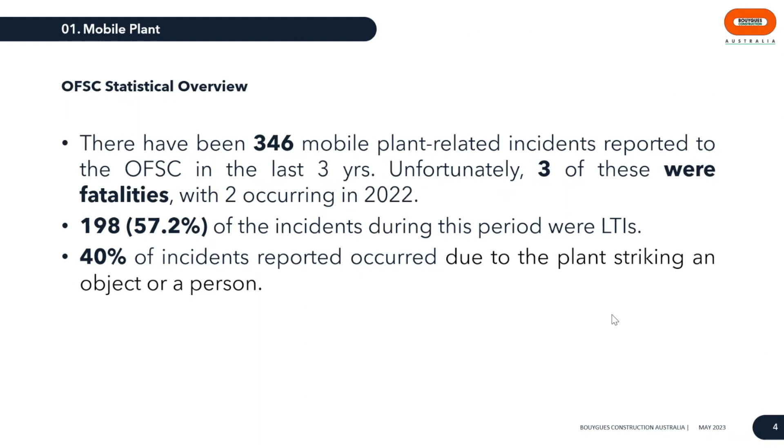40% of the incidents reported occurred due to plant striking an object or person. So plant are certainly quite prevalent in terms of incidents being reported by scheme accredited contractors to the OFSC.

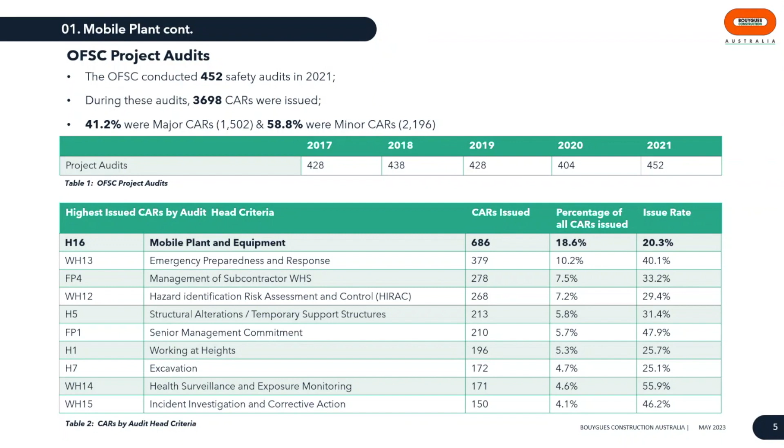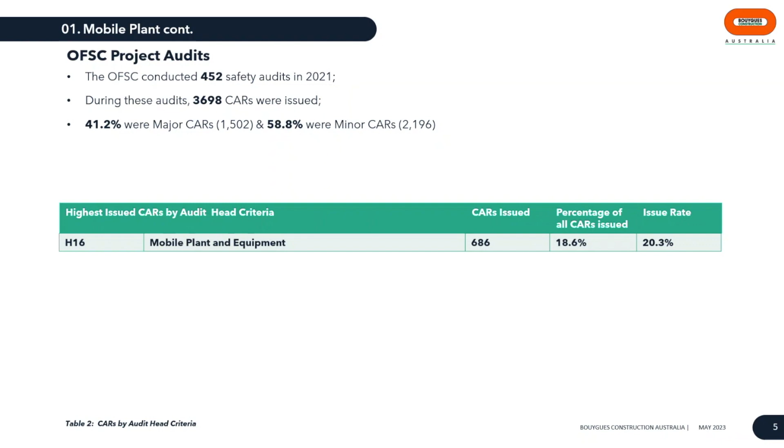In terms of OFSC project audits, there's been 452 conducted in 2021. In terms of the breakdown across the scheme criterion, if we look at hazard criterion 16, mobile plant and equipment, there's been 686 CARs issued, which equates to 18.6% of all CARs issued by OFSC. So the single largest contributor for corrective actions issued is mobile plant and equipment H16.

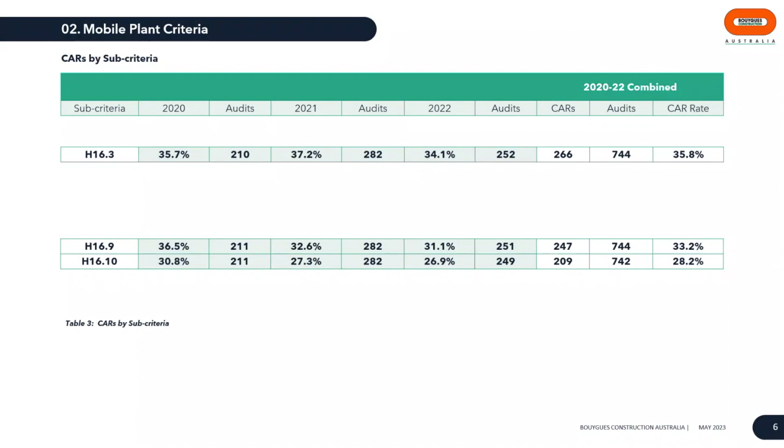If we look at the breakdown of H16, the top 3 contributors: 16.3 resulted in a CAR rate of 35.8%, 16.9 a CAR rate of 33.2%, and 16.10 a CAR rate of 28.2%. 16.3, as most of you are aware, relates to safe systems of work for the provision and operation of mobile plant. 16.9 is inspection and maintenance, and 16.10 focused on preventative maintenance.

I would say from experience, if you're having difficulty demonstrating compliance with 16.9, most probably you're going to be distressed with criterion 16.10, because the two are quite closely related.

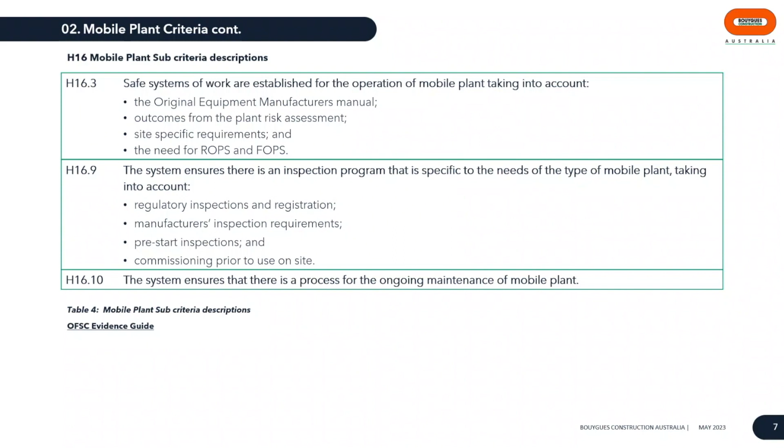In terms of the Bouygues Construction Australia safety program, and I suppose a bit of context as to why I'm presenting today, our safety program has six key pillars: company safety standards, safety leadership, critical incidents, risk management, system simplification, and in particular, tech and innovation.

So just to talk you through a few practical examples of technology innovation as being applied by BYCA. BIM modelling is obviously more customary practice in the industry, but the BIM modelling leads into the use of digital twins throughout the design phase, to create a virtual environment of the project design that can be tested for space proofing and to ensure that we're aligned with all of our health and safety requirements.

And our methods planning process, which is unique to Bouygues. It's a process where we utilise 4D CAD software to pictorially illustrate each step in the construction sequence of all high-risk activities. These methods drawings are then collated and presented in what we call a critical risk review session, where they're peer-reviewed by discipline leads and other project leaders.

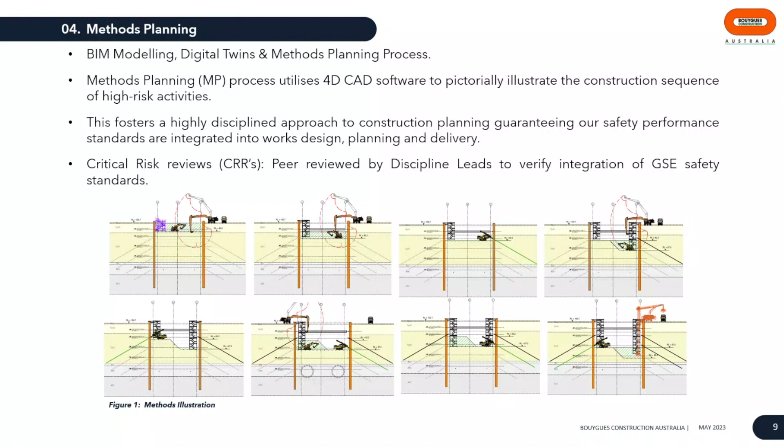Now, the methods drawings enable us to pictorially represent all of our company safety standards or critical risk controls. It allows us, through that peer review process, to test the space proofing, the plant-people separation, and pertinent or critical risk controls relating to cranes and lifting or temporary works, as an example.

Proximity detection systems. I want to speak to two particular incidents which occurred across our operations. One on the NorthConnex project, which occurred back on the 20th of January 2017, where we had a gantry crane impact the jib of a crawler crane.

A crawler crane was mobilised into the shaft enclosure building on this particular site at Wilson Road due to the productivity rates with the gantry crane, obviously working in very close proximity and interfacing with the gantry crane. On this particular occasion, the mobile crane had slewed around, and unbeknown to the gantry crane operator, who then tried to traverse the gantry crane, had actually struck and made contact with the jib of the mobile crane.

On this particular occasion, we'd actually retrofit the Strata system, which was a proximity detection system, to the gantry crane. What it actually did was alert the operator, and being an active system, it not only alerted the operator to the presence of the boom of the mobile crane, but it actually overrode the power system of the gantry crane and brought it to a standstill in the process as it made contact with the mobile crane.

What was significant on this particular occasion was there were two workers working from a crane workbox suspended circa 100 metres above the invert level of the tunnel, above the shaft at that particular site. So it had potential to be a catastrophic event.

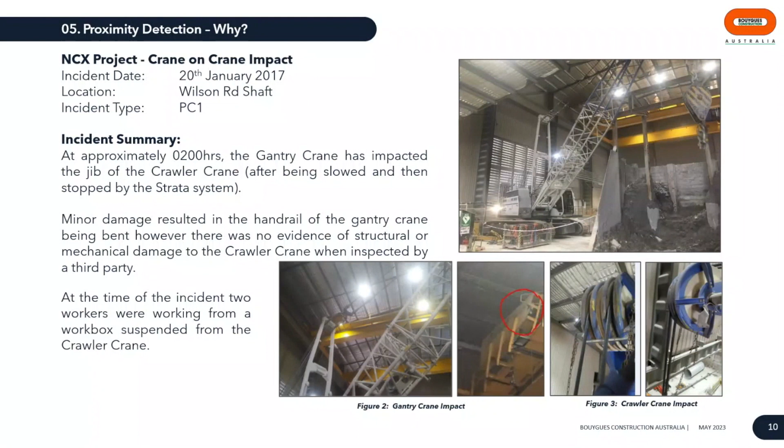This was averted through the application of the proximity detection system, Strata, on the NorthConnex project, albeit it was rolled out to all the large-scale, high-volume plant within the tunnel environment, retrofitting it on the gantry crane, albeit not the intended application when we instituted this particular system.

I can definitely attest to the fact that that prevented a catastrophic event. A second example where we've applied or deployed proximity detection was an incident I'll touch on, back in 2019 at the SBI site within the WestConnex 3A project, where we had a front-end loader loading our tunnel spoil from the M190 portal into the back of an articulated dump truck.

In the process of reversing, the loader struck the basket of a stationary EWP with a worker in the basket. The EWP had traversed behind the front-end loader into its blind spot, unbeknown to the operator.

Although the operator immediately applied the brakes in response to activation of the proximity detection system, which was the Blaxtair system on WestConnex 3A, the loader still contacted the EWP, causing damage to the basket. However, a more significant consequence was prevented.

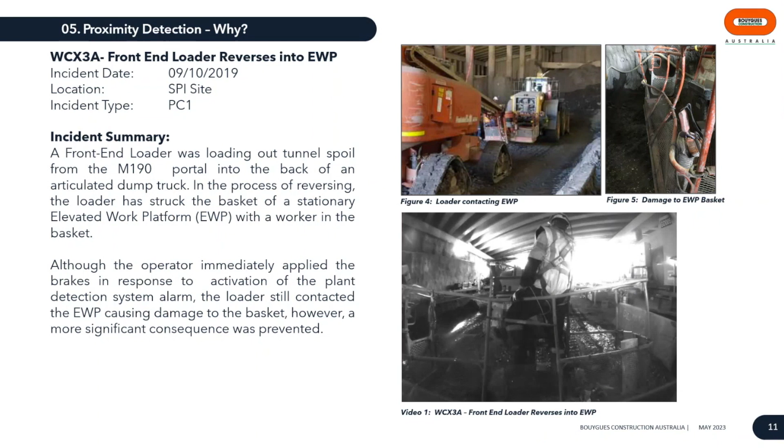NorthConnex, again, was a Strata system, which was an active system. The way that works is there's an outer threshold that detects the presence of a pedestrian. It alerts the operator, which is typically a 10 to 12 metre zone.

If the pedestrian continues to encroach closer to the item of plant, to the inner threshold, which is circa 6 to 8 metres, as an active system, it actually overrides the power system of the plant and slows the plant down to a walking speed.

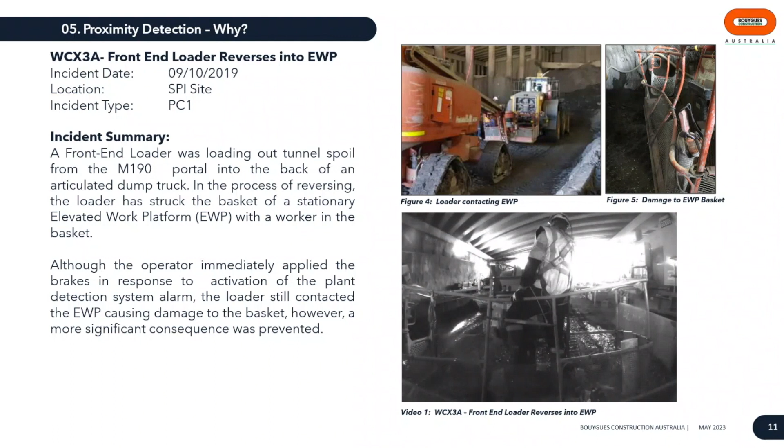Blaxtair is a passive system, not an active system, and it relies upon the use of sensors to continuously scan the blind areas around plant and reconstruct a 3D environment. The identification and nature of each obstacle is based on video recognition algorithms developed by the French Atomic Energy Commission, used to alert the plant operator of the presence of a pedestrian or a worker.

The graphic in the middle, in the lower portion of the slide, depicts the screen which will be viewed by the operator of the plant. Green denotes that it's clear, the cameras have not identified, or the Blaxtair system has not identified, the presence of a worker.

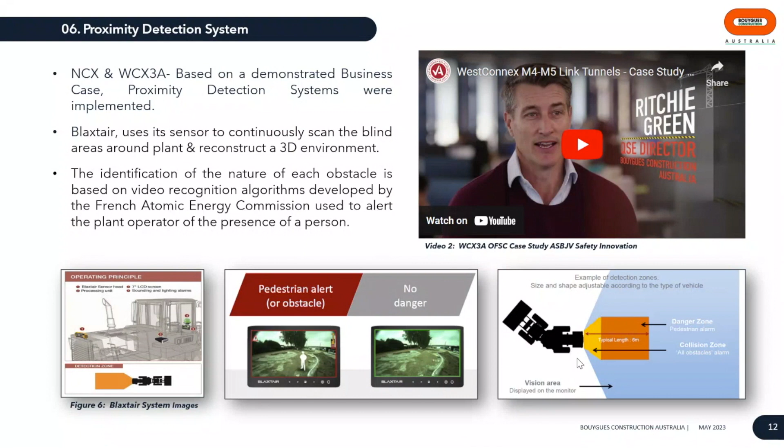With the algorithm, in the left-hand picture there, it's identified the form of the human body or a worker, and it basically activates the alarm and the flashing red symbol on the panel, which is viewed by the operator within the cabin.

In terms of a net safety benefit, I think we could clearly attest that the deployment of proximity detection systems on both WestConnex 3A and the NorthConnex project have prevented a critical event, possibly one with the potential to result in a fatal incident.

As another example of plant innovation is the Brokk tool. The Brokk tool is a remotely operated plant removing people from dangerous or repetitive tasks. It's an example of innovation whereby the excavator is remotely controlled, eliminating the need for a plant operator.

In terms of a net safety benefit, there's a reduced worker exposure to respirable crystalline silica and the risks associated with unsupported ground. Through our deployment, we've also demonstrated we've met our productivity objectives by deploying this particular innovation.

We can report an increase in productivity, also a decrease in breakdowns and downtime with mobile plant. So again, it's a good example where we've aligned our safety objectives with our productivity objectives, and the two have been integrated, and certainly we've delivered on a positive safety outcome.

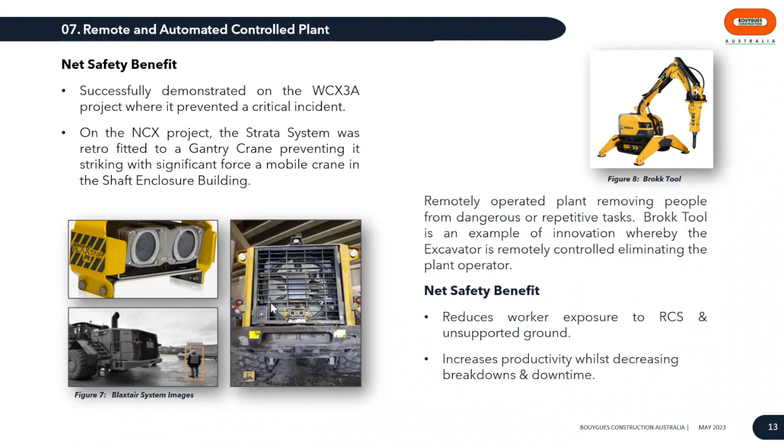In terms of further innovations, the ASB JV on the WestConnex 3A project utilised inflatable brattices as an innovation to reduce RCS exposure. Inflating the brattice is a simple and safe method to seal the working area in the tunnel environment.

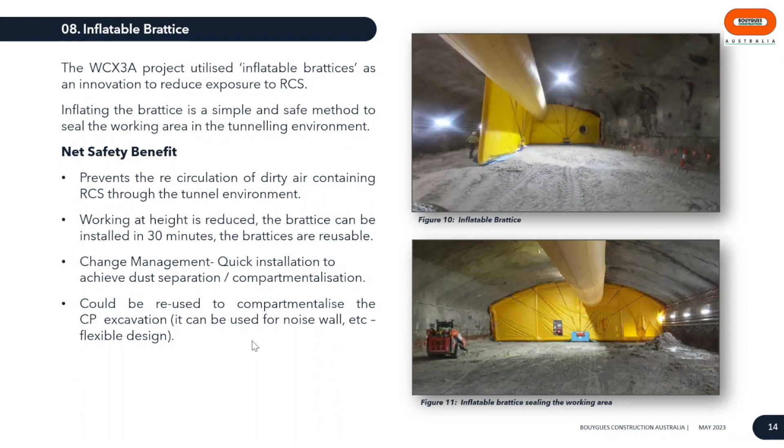It prevents the recirculation of dirty air, pushing RCS contaminated air into other areas or zones within the tunnel. As a consequence, we're also able to reduce work at height. The brattice can be installed in 30 minutes, so it's quick, effective, and reusable. In terms of change management, the quick installation achieves dust separation and compartmentalisation, and it has application in cross passages as well, to prevent contaminated air pushing out from the CPs into the tunnel drives. Very simple, practicable, achievable, and certainly delivers a net safety benefit by preventing the recirculation of dirty or contaminated air.

Another example on the WestConnex 3A project was the fob system, developed in partnership by the ASB joint venture, GB Auto, and Intellifleet IVMS system. The hardware linked with the Pegasus system, which was used to track operator competency, and in particular the status of high-risk work licenses, VOCs, and their authority to operate.

The technology utilises underground Wi-Fi and functions offline. Operators simply tap their Pegasus card on the fob hardwired panel of the plant prior to activating the ignition. Any unauthorised plant movement activates the flashing headlights and blasts the horn. It can be used to override and prevent the plant being operated, but the ASB JV elected to enable the operator to operate the plant to cater for emergency situations, while still activating the flashing light and horn to alert the adjacent construction workforce and supervisor that an unauthorised person was operating the plant. On WestConnex 3A it was implemented on 120 items of plant, including 42 dump trucks, excavators, skid steer loaders, wheel loaders and telehandlers, representing a circa $850k investment.

Now I'll attempt to play for you a quick video reel to show you when an unauthorised operator jumped into the plant, and how it activated the horn and flashing light.

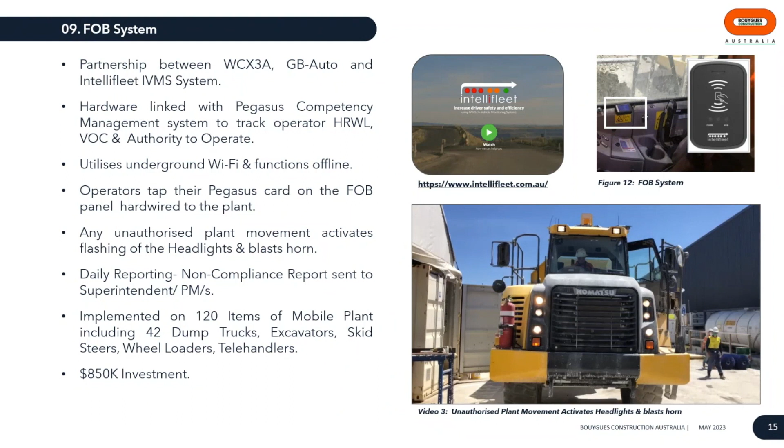That would certainly grab the attention of the adjacent supervisory team on site, and again alert the ASB JV to the fact there was an unauthorised person who had not received an authority to operate. Quite an innovative piece of technology.

Other examples of plant innovation were the Halo system, which is more customary practice out in industry. We had a very good experience adopting that technology on the WestConnex project, as well as the use of presence sensing systems in the cross passages.

With the CPs, they're narrower, so it's very difficult to locate a hard barrier for people-plant separation as required by the project GMR safety standards. So we deployed the presence sensing system, which provided a visual line showing a safe location for the pedestrian or worker to travel or walk through the cross passage. The presence sensing functionality would instigate an alarm and a flashing red light at either end of the CP, alerting any operator of mobile plant on approach to the cross passage that there was a worker in the immediate vicinity on foot, possibly in a blind spot just behind the intersection of the cross passage. Quite an innovative piece of technology.

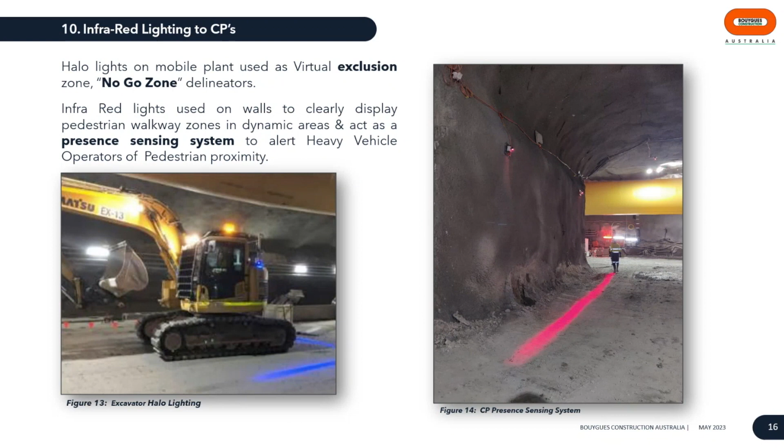The rotating lifting tool was another innovation, designed by the ASB JV on the WestConnex 3A project. It was used due to the height restrictions at the site. The panels are delivered on their side, with the ultimate need to rotate them 90 degrees to locate them into their installed or design position. Typically, this task is completed via a dual crane lift, which, as most of you are aware, is a highly hazardous process.

One crane is used for the main lift and the second crane to maintain the precast panel at its base. The primary risk of performing a dual crane lift is the potential to overload the crane and/or overturn the crane. To improve safety and efficiency, following successful trials with a precast supplier, the rotating tool was successfully implemented, eliminating the dual crane lifts for this activity.

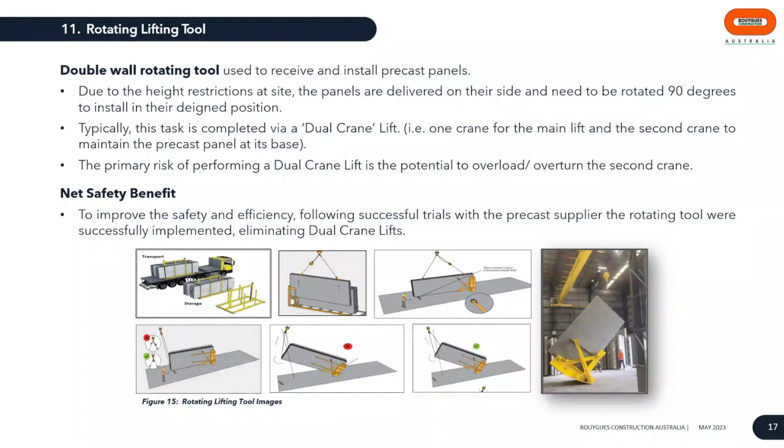So again, quite innovative, and again, a very controlled process to actually locate the precast panels via the use of the lifting tool.

Another lifting tool developed on the WestConnex 3A project was for use with long egress passage precast sections, due to height limitations within the tunnel drives, where the precast units would be rotated from horizontal to vertical on site using a dual hook setup. This system relied upon a spreader bar to lift each unit, while the LEP precast unit was modified to allow an engineered tailing beam to be temporarily installed at the bottom of each unit, with attached rigging linked to an additional sheave.

In terms of net safety benefit, to improve safety and efficiency, trials with the supplier of the precast panels were undertaken, and ultimately substitution of the work method in terms of the hierarchy of risk control was risk substitution, but it eliminated the risk of a dual crane lift, hence eliminating the risk of crane overturning and/or loss of control of the load.

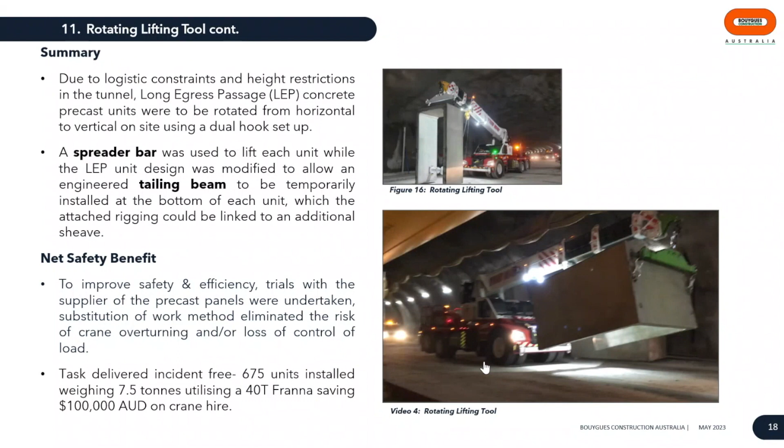In terms of its application on the WestConnex project, it was utilised for the lifting and transfer of 675 units, each weighing circa 7.5 tonnes, using a 40-tonne Franna crane, saving circa 100k AUD on crane hire. Again, a good example where we were able to align the safety objectives of the project with our financial and program objectives. I'll just play a short video clip for you.

Again, very simple, but innovative and certainly highly effective. You could see from that video clip the long egress passage precast units were rotated from a vertical plane to horizontal, which enabled them to be traversed in a very safe method through the tunnel drives, where they were restrained by the system.

That also enabled, in the horizontal plane, the Franna crane operator to lower the boom as low as reasonably practicable while traversing through the tunnel drives. Then, in a very controlled manner, they were moved back into a vertical plane, back into their designed or located position.

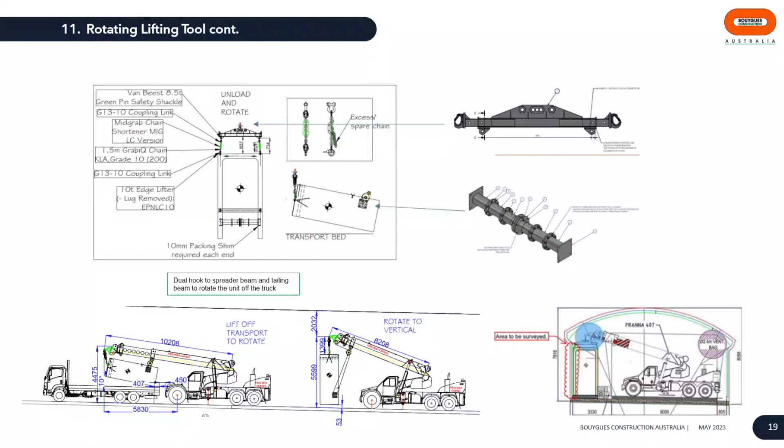Mechanical arm was another initiative of the WestConnex 3A project, where initially we would rely on having a young, typically graduate engineer or construction worker up at height on the mobile scaffold to sample the concrete being delivered for the continuous reinforced paving via the tipper trucks.

Testing was being undertaken at height, as well as exposing that particular operative to a risk of falling into or becoming involved with the back of the tipper truck. The LSBJV went away and undertook a study of that activity, and developed an initiative which was the mechanical arm, ultimately used as a substitute for the concrete testing previously performed manually at height on top of the scaffold by a young graduate engineer or CW.

Again, quite effective, and a very good example of where I would integrate our safety objectives with the program objectives of the project.

Net safety benefit was clearly realised because we eliminated the worker at height sampling or undertaking the testing. In terms of the sampling process, we improved the cycle time efficiency, from 15 minutes reduced to 4 minutes. In terms of the value proposition, the number of testers required reduced, leading to a $600 saving per shift. So through a mega project like WestConnex 3A, delivered over a circa 4-year contract duration, that led to a fairly significant saving, as well as demonstrating our safety values and safety innovation.

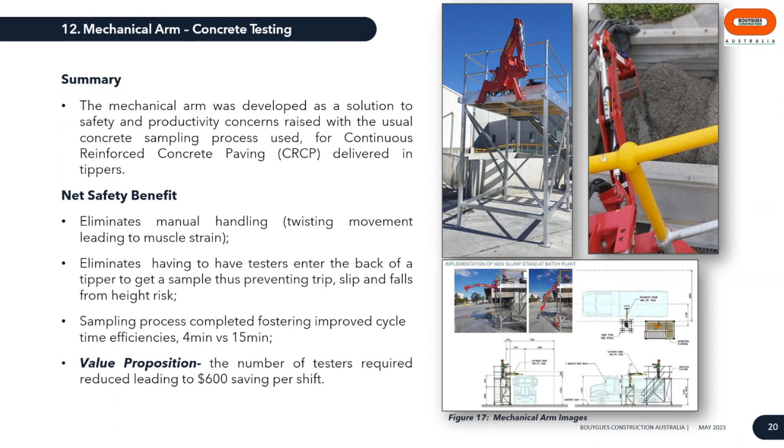Thalia was a TBM simulator. This is Bouygues Construction patented technology, deployed on the Melbourne Metro project and adopted by the Cross Yarra Partnership. Through the TBM simulator, we're able to run TBM pilots or pilot trainees through a number of scenarios where we depict 15 critical high-risk scenarios associated with TBM operation, including tunnelling through ground faults, poor ground conditions, and over-excavation. The use of Thalia guaranteed safe program delivery for the tunnelling works on the Melbourne Metro project, significantly diminishing tunnelling risk through its delivery.

Evaluation of success: CYP utilised Thalia to train and upskill 6 TBM pilots, fostering local skills development and leaving a lasting legacy for the Victorian construction industry. This is a very good example of CYP's adoption of the simulator in terms of delivering a net safety benefit to the project and the Victorian construction industry more broadly.

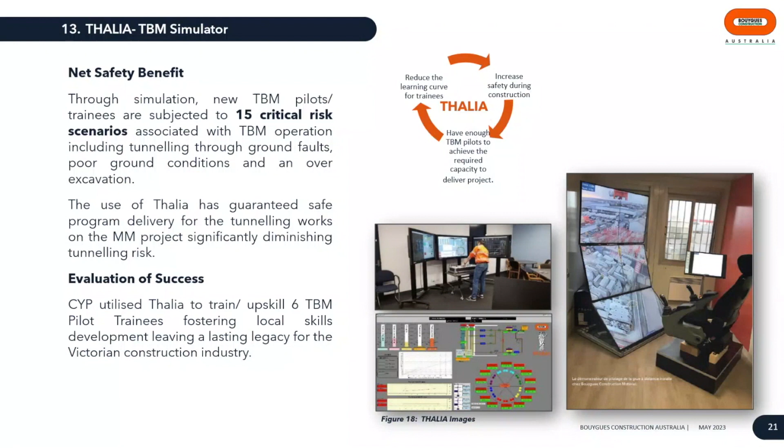Camera AI system: on the WestConnex project, again to increase the crane operator's situational awareness, giving them eyes on the hook, the project implemented the Apollo M1 camera technology, guaranteeing safe crane and lifting operations by providing real-time visual of the crane hook and lift, giving the crane-appointed person remote visibility and transparency of critical crane lifts, anticipating safety risks arising from any environmental factor or unsafe load configuration in real time.

And it also enabled the team to undertake diagnostics, providing operational data for analysis of individual crane lifts.

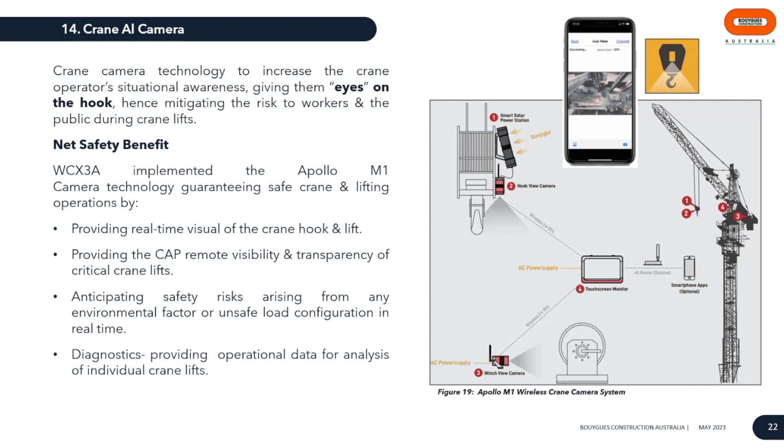Okay, pile cap removal. This was really an innovation deployed as a part of the work method utilised for the break back process with piling operations on the Melbourne Metro project by the Cross Yarra Partnership. The method involved a chemical system using an expanding mortar to create pressure and generate a perfectly horizontal cut, so the top layer of the concrete in the pile can be easily removed by a crane.

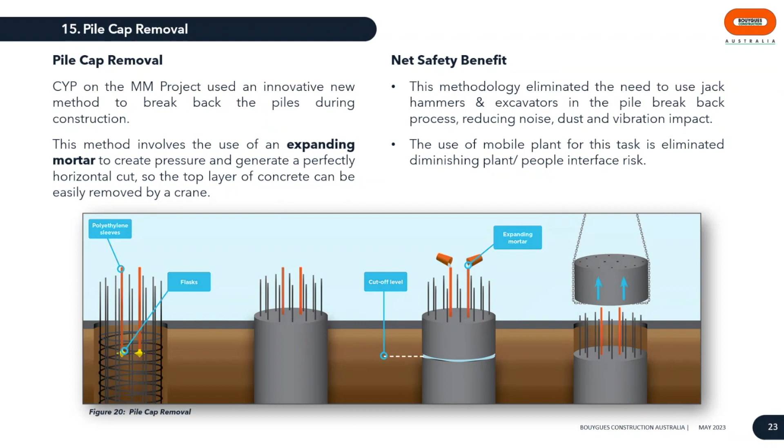In terms of a net safety benefit, the methodology eliminated the need to use jackhammers and excavators in the pile breakback process, reducing noise, dust and vibration. The use of mobile plant for the task was also eliminated, diminishing the plant-people interface risk, being the most significant net safety benefit realised by deploying this particular methodology of utilising the expanding mortar.

Virtual Super and IVMS system, an in-vehicle monitoring system. It was a system deployed on the NorthConnex project as well as the WestConnex 3A project. It's a user-based vehicle monitoring system that tracks heavy vehicles in real time, monitoring speed, fatigue, vehicle routes, and other heavy vehicle driving events. The system collects live monitoring data and uploads to a web-based and mobile app, facilitating the management of heavy vehicle compliance in respect to chain of responsibility obligations under heavy vehicle national law.

Virtual Super also allows drivers to conduct various COR checks that they sign on and off when using the mobile app known as SafeSight. So very effective in terms of its ability also to monitor fatigue, and again having a demonstrated application on both the NorthConnex and the WestConnex 3A projects.

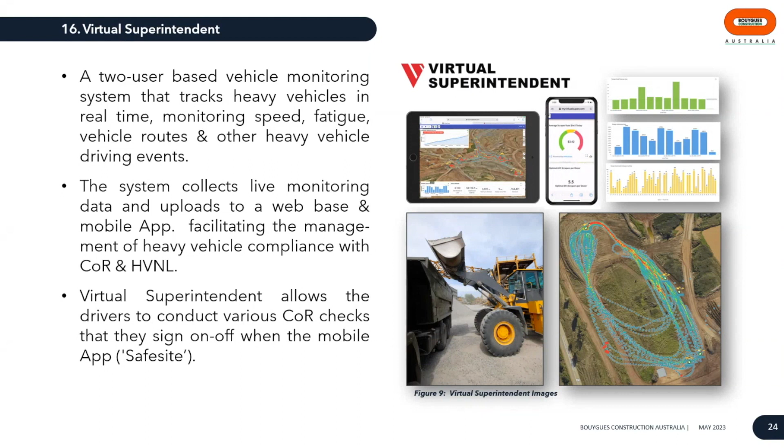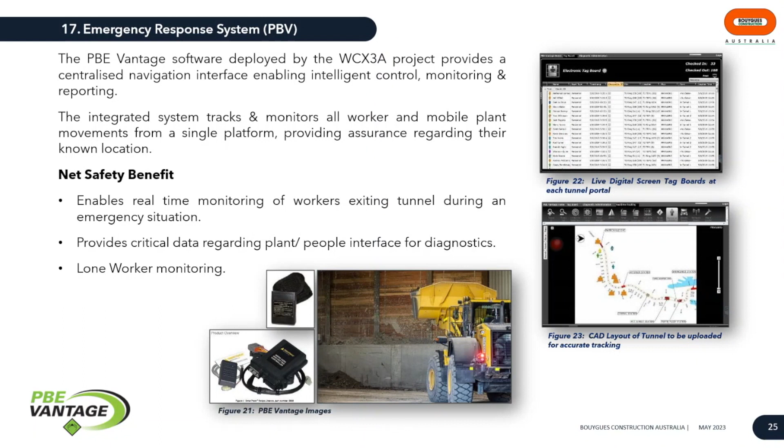In terms of net safety benefit, it enabled real-time monitoring of workers exiting the tunnel during an emergency situation. It provided critical data regarding plant-people interface for diagnostics, and also has an application for the monitoring of lone workers. So again, quite successfully deployed on the WestConnex 3A project.

The Seeing Machines is something at the back end of WestConnex. There was a trial run, albeit a very light trial, to monitor the Seeing Machines. It's probably more a blue sky initiative for us, which we continue to research and undertake some analysis on for a potential deployment on the next major project.

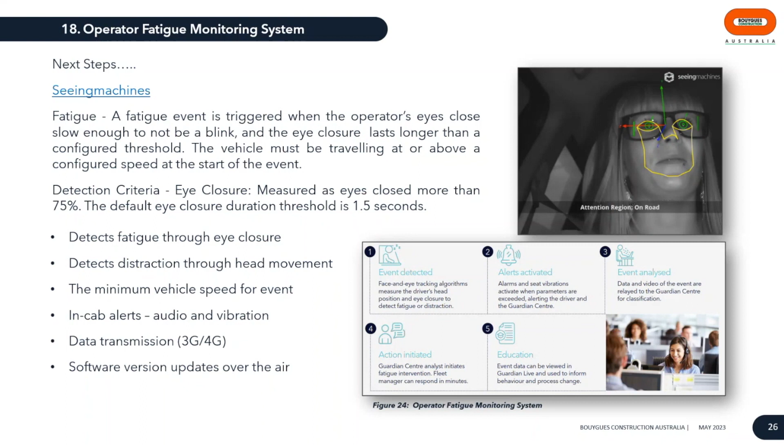It pushes notifications as a part of in-cabin alerts, audio and vibration, data transmission running off 3 and 4G, and software version updates over the air. So again, we ran a light trial at the end of the WestConnex 3A project, but as a part of something that's a bit more blue sky for us, something we're certainly looking more closely at for future deployment. And again, it's technology that's been deployed in the mining sector and also across the heavy vehicle and logistics sectors elsewhere in Australia.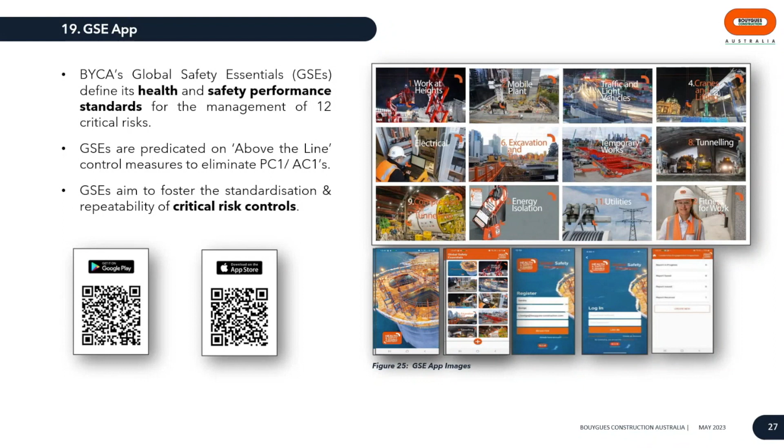They're the critical performance standards we rely upon for the management of all the critical risks across our operations, from work at heights, mobile plant, cranes and lifting, temp works as an example. And we've also got 2 GSEs nuanced towards tunnelling activity, GSE 8 and GSE 9 for compressed air tunnelling. They're publicly available. They're published on Google Play and Apple, and you're welcome to download a copy.